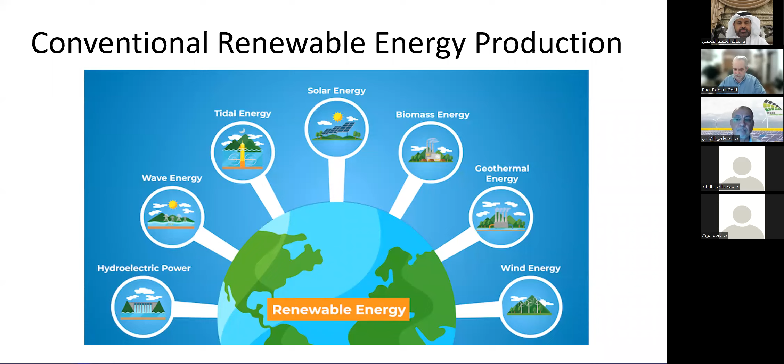We're going to start with solar energy. The sun is at the center of it all. Every day, the sun pours more solar radiation in the form of photons onto Earth than we need for an entire year to power everything on Earth. It could be powered in one day if we had the ability to collect all of that energy.

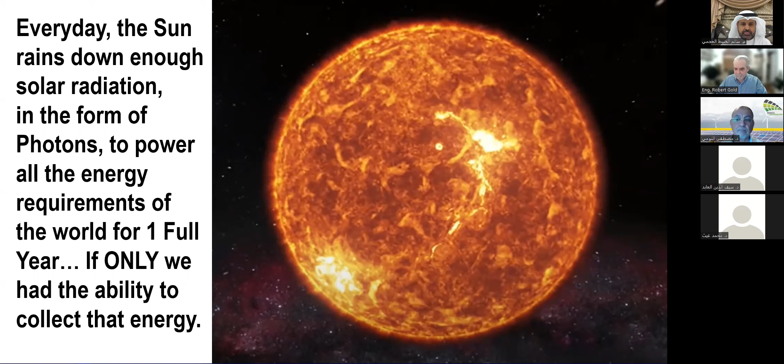You might all know his face, Elon Musk. He once said that if we wanted to power the entire United States, all we'd have to do is take a small section like this, 100 square miles, with solar cells, and we could power the entire United States. Well, right now, I don't think that's possible, and I'm not sure he was correct. There are too many good renewable power sources that can do the job better than taking 100 square miles of the country - any country, whether it's here in the States, Europe, the Middle East, anywhere. There are so many different ways that we can do this.

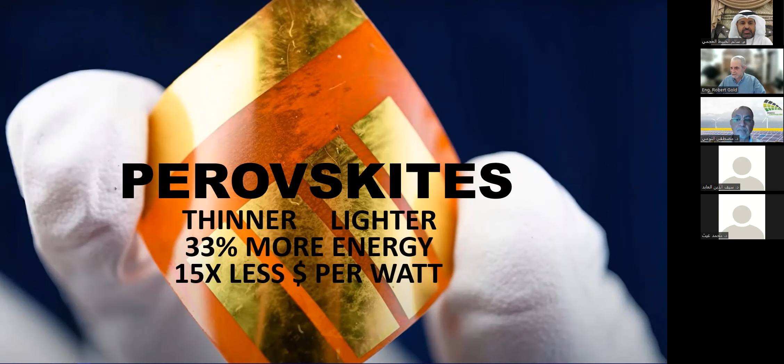Right now, silicon is really the beating heart of solar products, and it's been that for the longest time. But there may be a revolution coming. That revolution is called perovskites. Perovskites are thinner, lighter, 33% more energy efficient, and they cost 15 times less per watt than normal solar cells. And they could be the future of photovoltaics.

And we're going to run a short video here to introduce you to them.

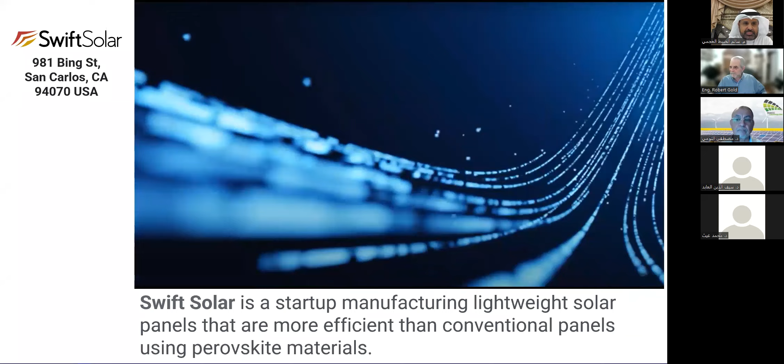It's a new kind of thin film technology, so you've probably heard of that for a long time. Different kinds of thin films have come and gone over the years. What we do here is a new kind of material. It's called perovskites, a new semiconductor material that absorbs light really effectively, also transports charge. So it just turns out to be very efficient material for solar cells.

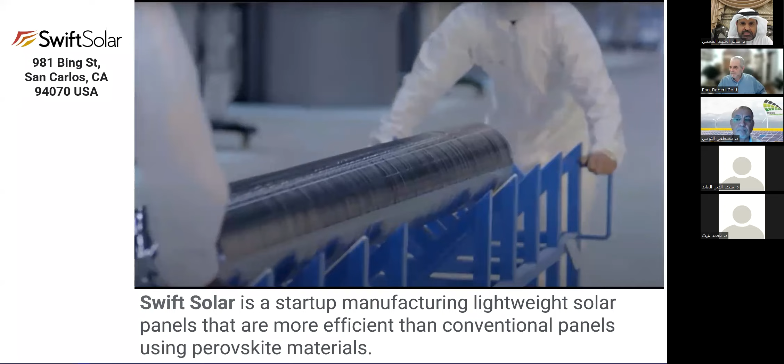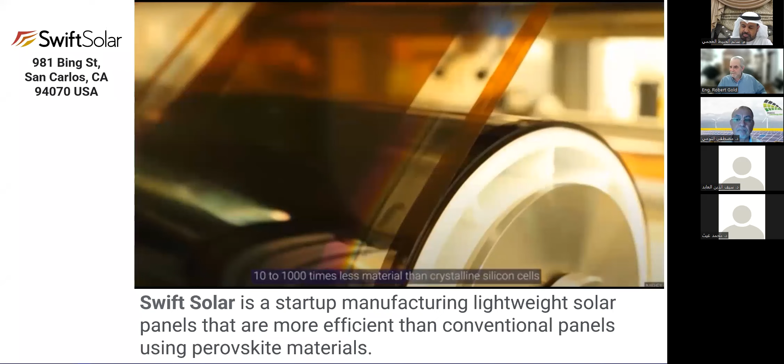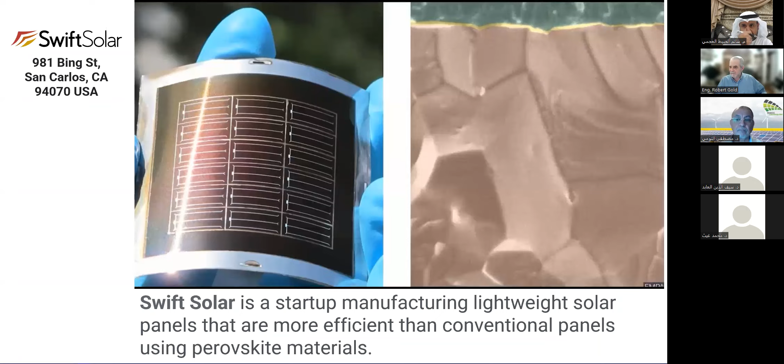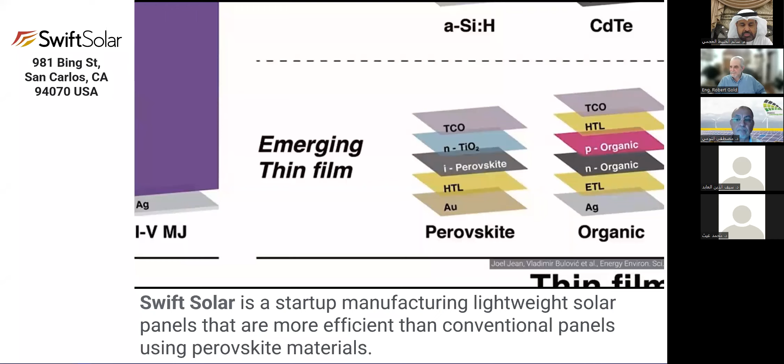Solar cell technologies can be classified into two categories: wafer-based or thin film cells. Wafer-based cells are fabricated on semiconducting wafers and are usually protected by a material like glass. These are the crystalline silicon cells you'll typically find on bulky roof-mounted solar panels. Thin film cells are made by depositing thin layers of semiconducting films onto a glass, plastic, or metal substrate, and use 10 to 1,000 times less material than crystalline silicon cells. These thin film cells are light and flexible but have lower average efficiencies. You can make thin film cells from amorphous silicon or more complex materials like cadmium telluride, but scientists have been on the hunt for better thin film solar technologies that can see more widespread use. These materials are known as emerging thin films. Currently, perovskites are the leading contender. What could you do with a solar panel with 100 times the power-to-weight performance of conventional silicon panels?

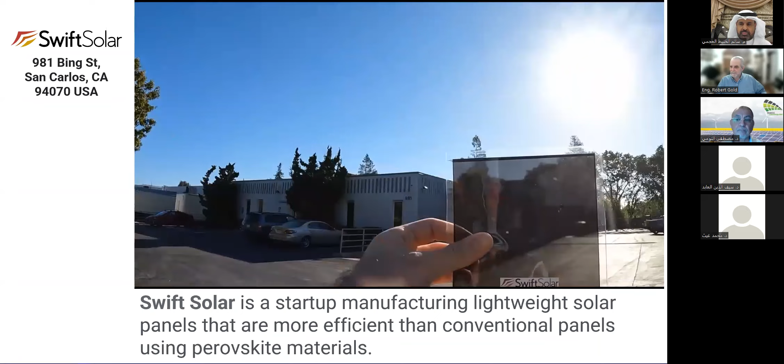A solar material so abundant it could be painted on skyscrapers. Flexible, lightweight, highly efficient cells could open up a wide range of applications where traditional silicon cells are too heavy and rigid. But before we cover your Tesla Model S Plaid in perovskite solar, what exactly is this revolutionary crystal?

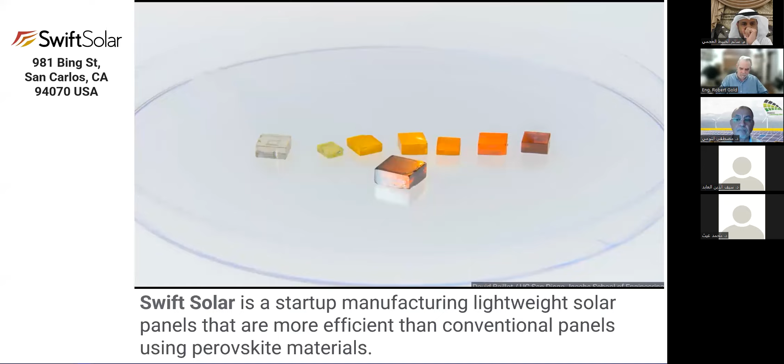The perovskite crystal structure was first discovered as the naturally occurring mineral calcium titanium oxide, but the perovskites used in solar cells don't need to be mined from the earth. A perovskite is any material with a crystal structure following the formula ABX3, where A and B are two positively charged ions, often of different sizes, and X is a negatively charged ion.

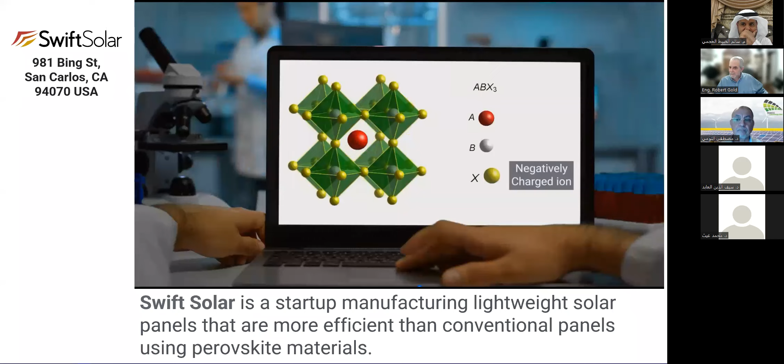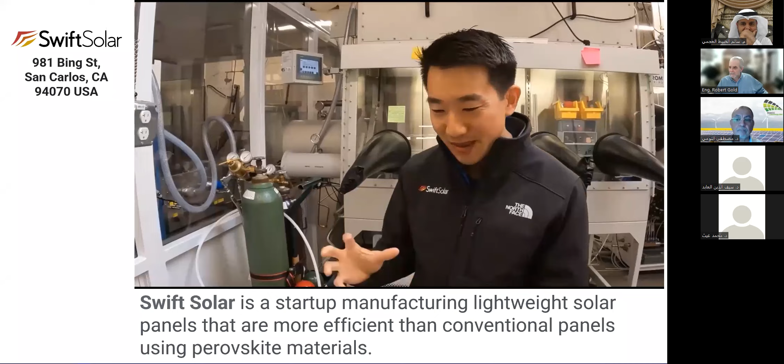Scientists realized they could create a diverse range of man-made perovskite crystals following the same arrangement that have very useful properties. So we use basic metal halide salts, things like lead iodide or some organic salts as well, and we combine them to make these inorganic-organic hybrid perovskites. You can form them in solution or in vacuum out of vapor phase, and they condense into forming these perovskite crystals. The thin films are what perovskite solar cells are made of.

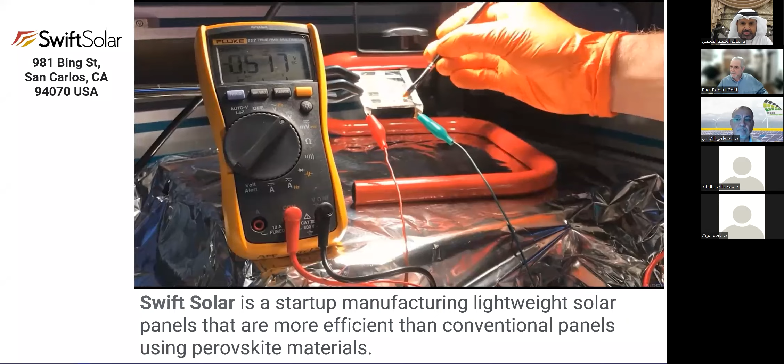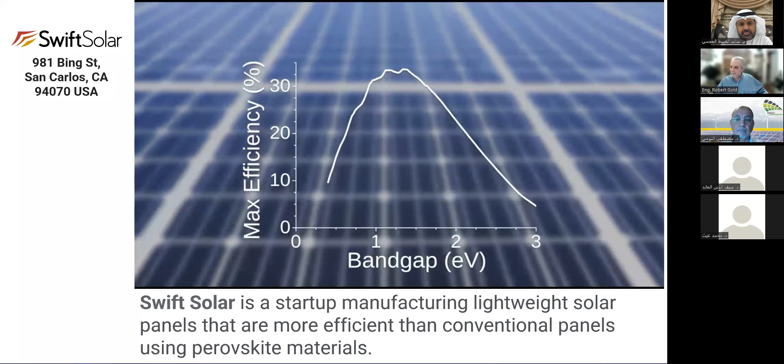The most efficient modern silicon solar panels you'd find on a home only work best at around 20% efficiency. But the theoretical conversion efficiency of single-junction solar technologies is about 33%, called the Shockley-Queisser limit. That's the fundamental limit for a single solar cell, single material-based solar cell.

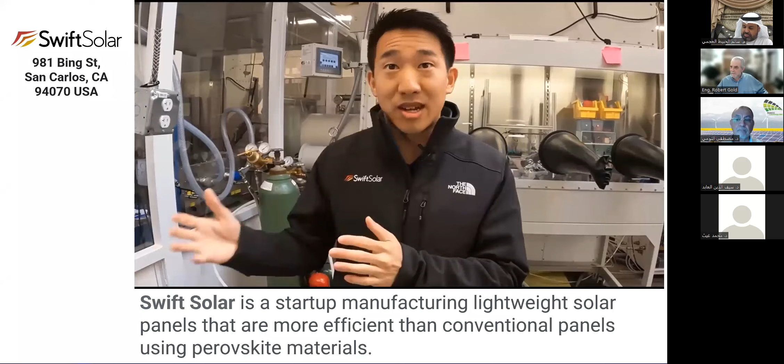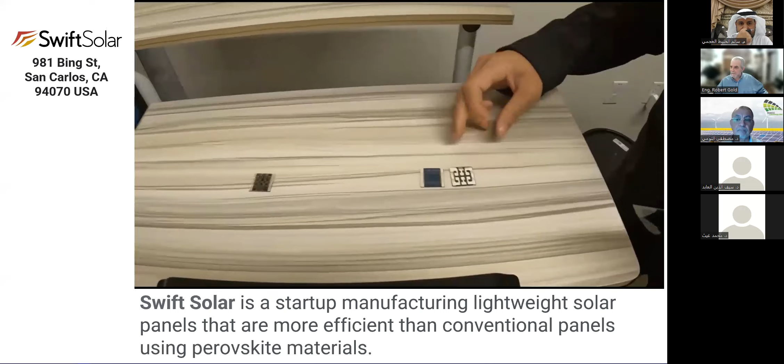Perovskites are the exact same thing. Silicon, perovskites, cadmium telluride, CIGS, all of these technologies have the same limit. But perovskite solar cells can be made in a form factor that's capable of much higher efficiency limits, pushing the boundaries of possibility for solar power.

That's one major breakthrough that is really escalating in the marketplace right now. Another is the fact that they've come up with ways to make printable or paintable solar cells, which will mean people can just paint their homes, paint buildings, whatever, paint vehicles even, to collect sunshine and energize their vehicles or houses. They're also using carbon nanotubes to create some of these paintable technologies, and these are 50,000 times smaller than a human hair. So this is really advancing the technology very rapidly.

Another recent breakthrough from the University of Cambridge, also spoken about in the Journal of Solar Materials, involves materials that are grabbing 100% of the energy carried by photons. This is ridiculously powerful, since most solar cells, as was just discussed, only absorb about 20% of the energy, and perovskites will do 33%.

So when they get these hybrid cells actually going out of this organic material, they're going to be able to harvest much larger amounts. If they make it to 50 or 60%, it will be a revolutionary breakthrough, and it will change solar forever.

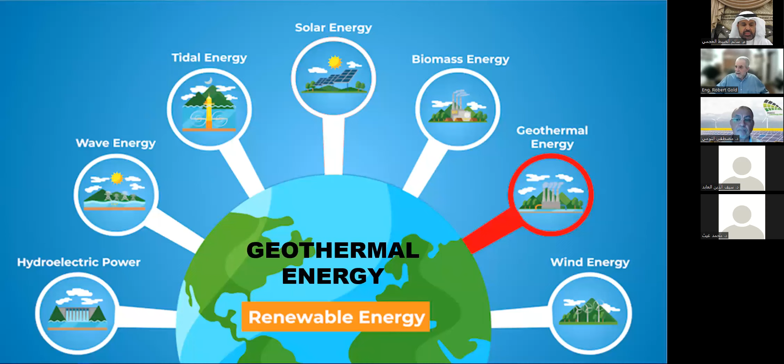Next, we're going to talk about geothermal energy.

A quick review: what is geothermal energy? If you've ever observed an erupting volcano or the geysers at Yellowstone National Park, you've seen geothermal energy in action. The Earth's crust is made of rocks and water. Deep below that is a layer of hot, molten rock called magma, which is even hotter than the sun's surface. The heat just over 6 miles below the surface contains 50,000 times more energy than all the oil and natural gas resources in the world.

Releasing a small amount of that heat in the right way can create electricity. A well drilled a couple of miles deep can capture the rising hot water and steam. That steam spins a turbine, and a generator produces electricity.

Geothermal is one of the least explored sources of renewable energy in the US, and most of us probably don't spend much time thinking about it. But since it's a pollution-free, renewable source of energy that's consistently reliable, at least it has been for the past 4.5 billion years, maybe we should.

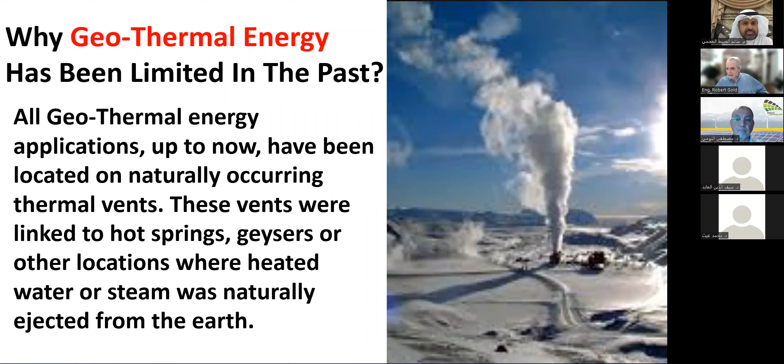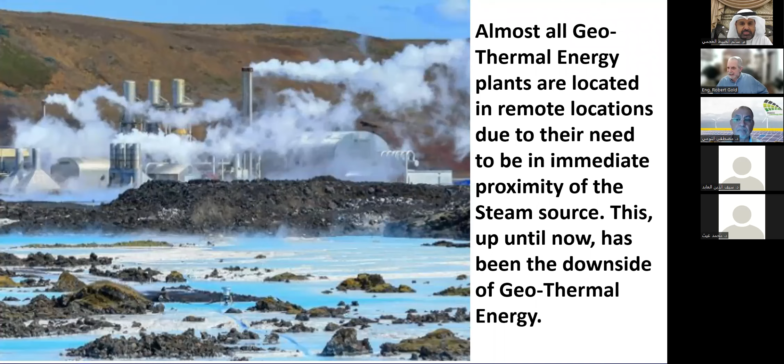So if it's such a great thing, why is geothermal energy such a limited resource? Well, there's a very simple answer. All geothermal energy up until now has been located at naturally occurring thermal vents, hot springs, geysers, things like that. But these were all located in places that aren't the most hospitable or easiest for industry to use. To get geothermal energy, people had to locate their businesses so that they could take advantage of this naturally occurring thermal source. Well, that's changing.

A company called Fervo is an advanced drilling company. They were into all sorts of drilling technologies for years, but they've now developed the next generation geothermal projects that can deliver 24/7 carbon-free energy.

How they're doing this is something called the enhanced geothermal system. Using advanced drilling technologies, they're capable of drilling holes way down into the earth, putting down piping, flowing water down there and injecting water from the surface, then bringing it up as very high pressure steam, turning that into electric power.

This is something that can be done anywhere. It's no longer exclusive to thermal vents or geysers. We can do this in deserts, in tropical areas, in the middle of any country, in the middle of a farm. You could drill these holes and bring up thermal energy.

After researching this, I feel this is going to really change the renewable energy landscape. Geothermal is going to become a large part of that energy component.

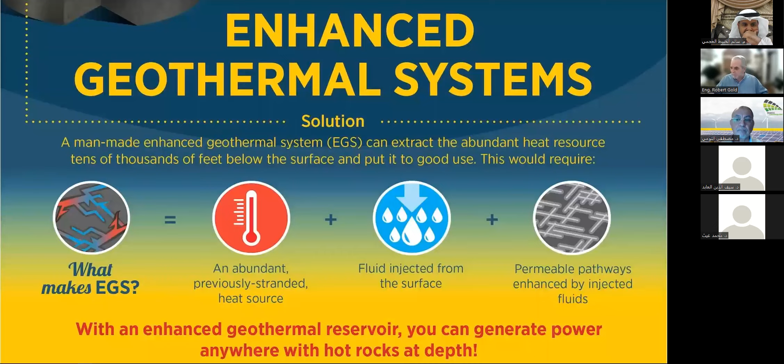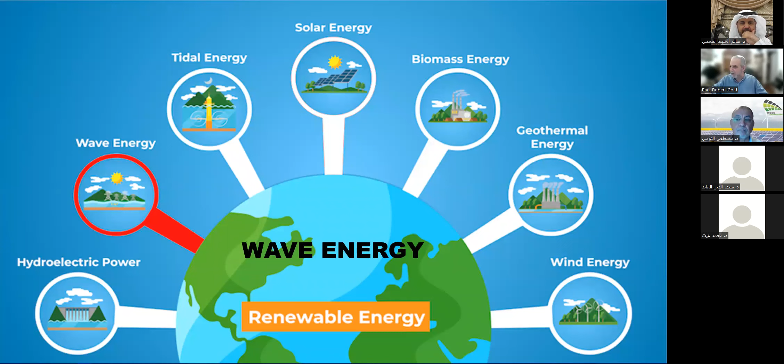The next thing we're going to talk about is wave energy. Wave energy is important because 70% of the planet is water. Three of our electric components here, hydroelectric, wave energy, and tidal, are all water-based energy sources. So let's take a quick look.

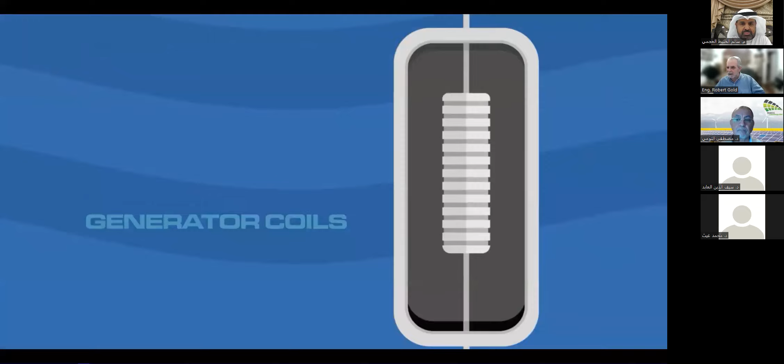What is wave power? Wave power is created by wind, and it creates the renewable resource that keeps waves moving all over the planet. What you're looking at here is a float on the surface moving up and down with the waves. It's pulling a cable that has magnets on it, and those magnets are constantly moving inside of generator coils, which, as we all know, is creating an electric current.

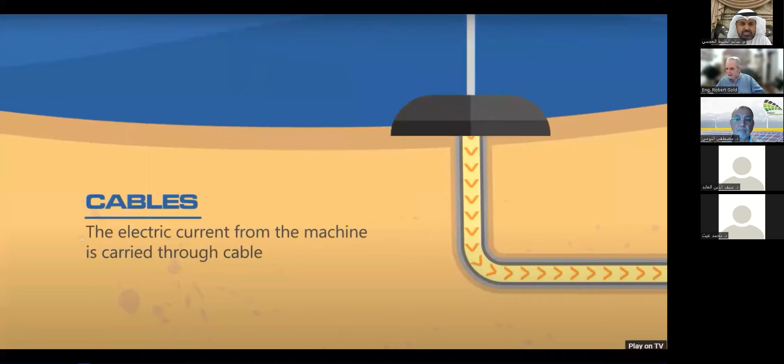That electric current is going into the foundation down below where it's anchored to the seabed, and then cables take it into the land where the energy is then used or stored. You can have literally thousands of these energy pumps sitting on the waves.

There are two types of major wave action renewable energy that are new, and I think they're revolutionary. One is the wave, what we call bobbing up and down, that we just saw. But the other one is something called a wave reservoir turbine.

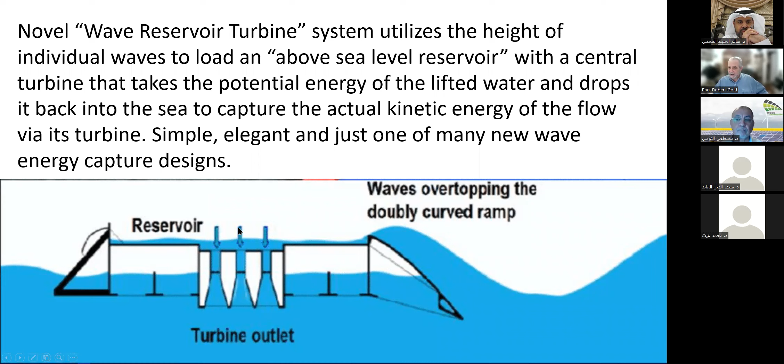The two that we've just spoken about, the bobbing up and down generator, shown here in a different configuration, and the wave reservoir turbine, are two of the latest technologies being introduced into the wave section of renewable energy.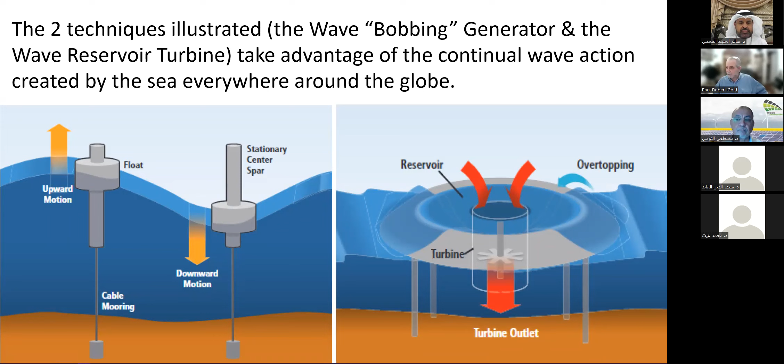We're going to talk about 4 of them first. Three of them are straightforward but very innovative ways of creating power with wind turbines. The 4th one, I have my doubts about. I've included it here because I want to make the point that not all of those 8,000 patents a year are credible. There are a lot of schemes out there because of the interest in wind power generation, where every inventor, and sometimes not really inventors but people just trying to make a dollar, are putting things forward that don't always work. But let's talk about what's out there.

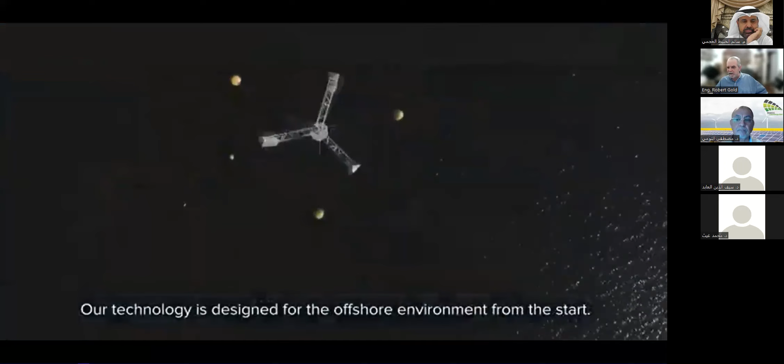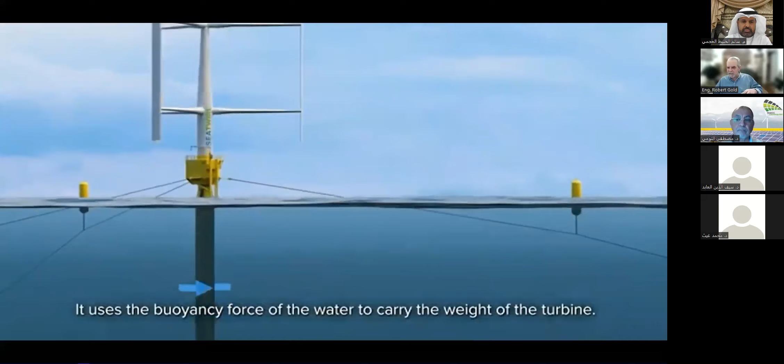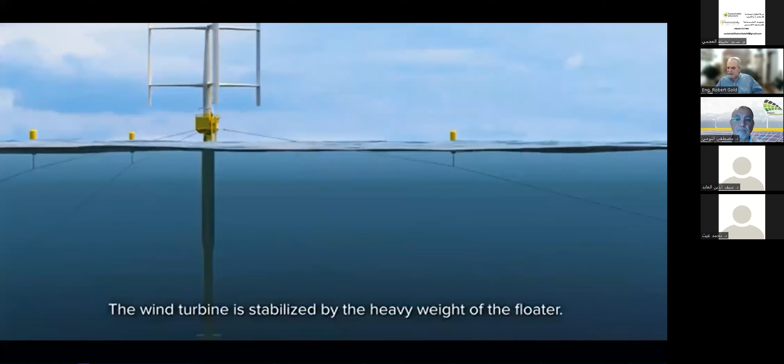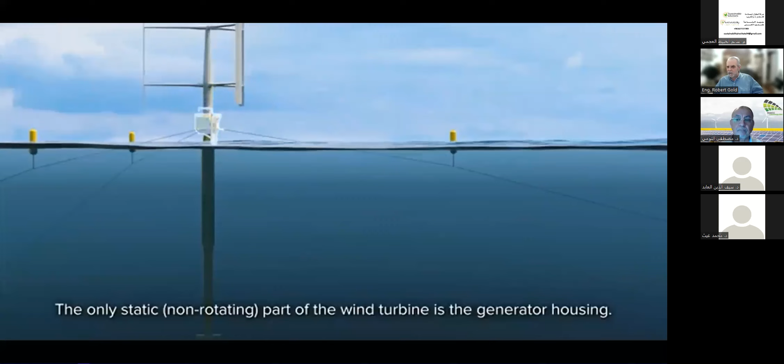SeaTwirl is important because it's built to withstand storms and hurricanes, and it can be placed where other types of wind generation turbines cannot be placed, and that is in deep water. All other wind turbines have to be placed in fairly shallow water because they're mounted into the seabed, whereas Sea Twirl floats and is held down to the seabed only by cables that keep it from moving. The actual system is carried by the buoyancy of the water, and it allows it to be in much deeper water. This is important because deep water is where you find the strongest winds, not really by the shore, it's out in the open ocean away from shore. So this is an important new type of wind turbine that is stabilized by its heavy weight, but its ability to sit out in the open ocean really changes the complexion of the wind turbine.

We have a couple of blurry parts here, I'm sorry, but I think I've already told you what that's trying to say. Offshore, where the winds are the strongest, that's where you can place these. The Sea Twirl turbines can be put way offshore and in much deeper waters, and that makes them a real contender in this industry.

VAWT, which stands for vertical axis wind turbine, is a new type of vertical axis wind turbine. Although we've seen a lot like the Twirl, this wind turbine is segmented so that it can have different spin rates, and that makes the spin velocity less damaging to the foundation where it's placed. So you can create the same or more energy with one of these than you can with a comparable one that is just one solid wind turbine.

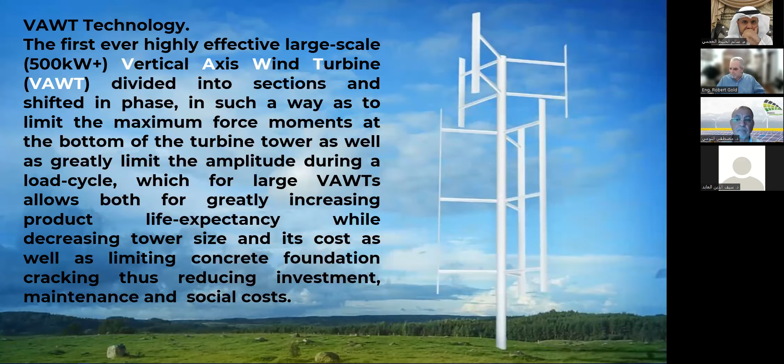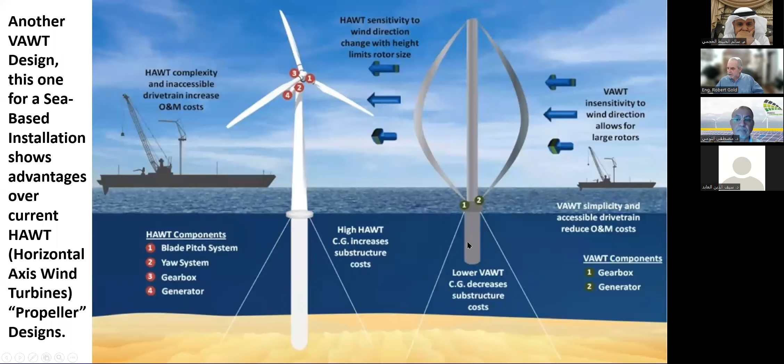Here you have a comparison between a HAWT, which is a horizontal axis wind turbine, and a VAWT, vertical axis wind turbine, and they have different uses in different places. The HAWT is better close to shore, the VAWT is better out in the open ocean. The Twirl is this type of turbine, but designed like this, it is simple and not sensitive to wind direction, so you don't have to worry about aiming it in the right way like you do with the other type of turbine. This is a new type that we've seen before at smaller scales, but allowing it to be anchored out in the ocean is really turning this into something that is cutting edge.

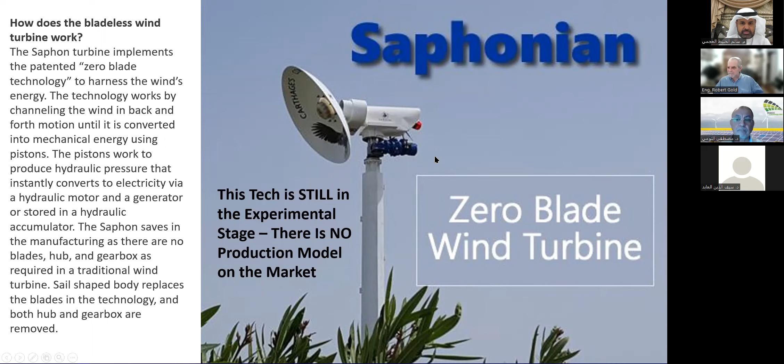Now, I laugh because I've looked into this, I spent hours looking at this technology because I didn't want to badmouth something unless I really had my concerns, and I do. This technology supposedly works by wind pressure against a surface that produces tiny piston movements which convert to hydraulic pressure, which then converts to electricity via a hydraulic motor. I have severe doubts about this, especially since they've already raised a lot of money and this technology still doesn't have an experimental production model. They haven't shown that it really works, but they're touting the zero blade wind turbine and raising a bunch of money on it. I say you don't raise money on something unless you've got proof positive that the energy source functions.

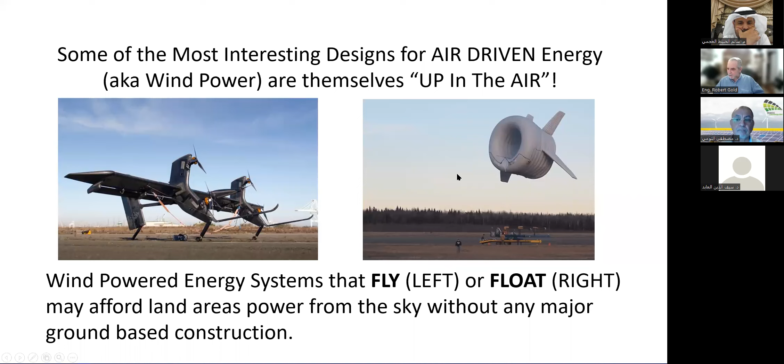Now we've come to what I consider the most interesting part: wind-powered products. What you see here are a flying or gliding wind power product and a floating wind power product.

Let's talk about the flying one first. It acts as a glider and uses the winds above 2,000 feet to keep it up and flying. It has some downsides, but the upside is that if it can be raised to the 30,000 foot level, you're going to get 20 to 40,000 watts per meter of power out of it, which is just truly enormous.

But you're also talking about having a 30,000 foot cable hooking one of these, and it's going to produce at minimum a 2-mile no-fly zone around them, so aircraft aren't smashing into these or the cables. But it is an interesting concept.

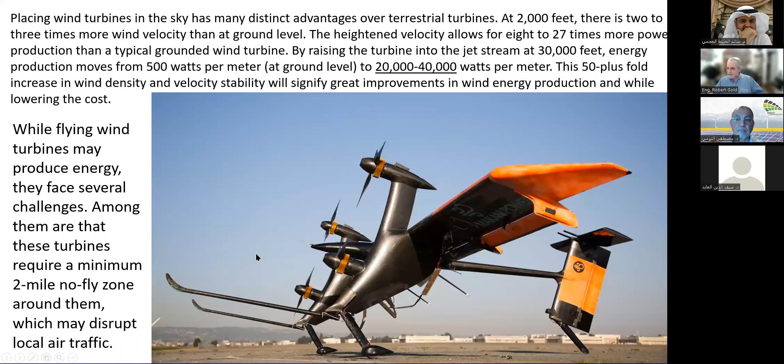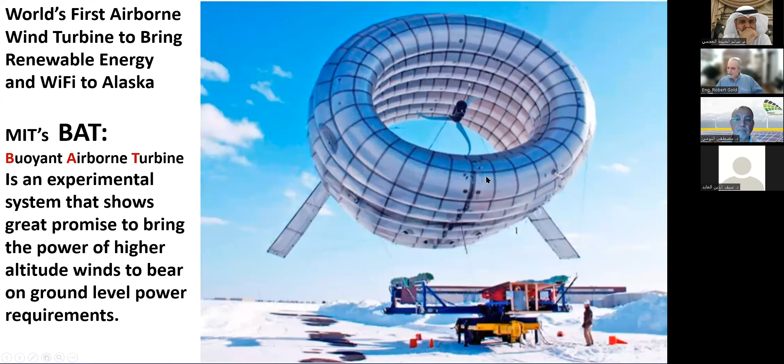More interesting is the BAT, the Buoyant Airborne Turbine. This has been tested since 2014. They're now going into a production run, and this floating turbine, you can see the turbine in the center here, can go up to 1,000 feet in the air and generate enough for, I think, this size.

But an important part of this is not just the power generation. It's the fact that Wi-Fi and cell towers could be built into these. So even small towns could fly these above them, generate their electricity, and provide Wi-Fi and cell service for that location.

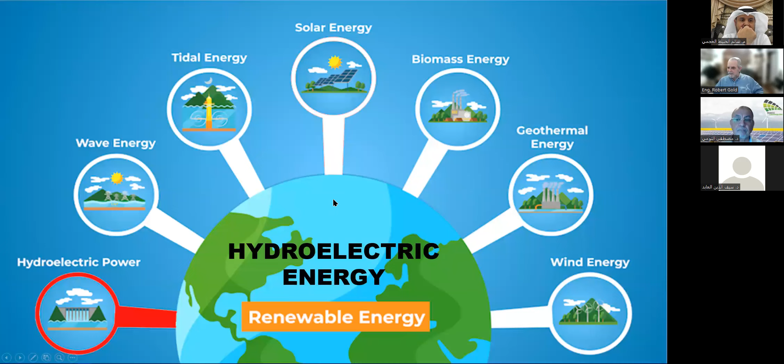Next, hydroelectric, back to the water. And again, a small primer on what hydropower is. Hydropower, or hydroelectricity, refers to the conversion of energy from flowing water into electricity.

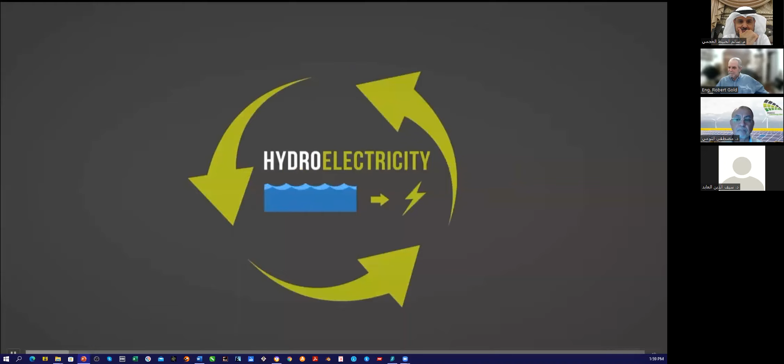It is considered a renewable energy source because the water cycle is constantly renewed by the sun. One of the first uses of hydroenergy was for mechanical milling, such as grinding grains. But today, modern hydro plants produce electricity using turbines and generators.

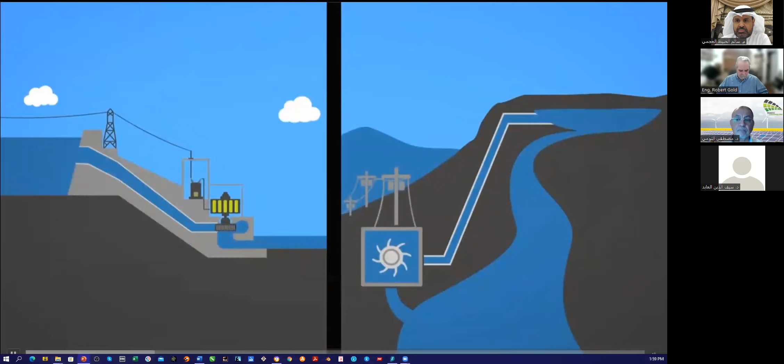The mechanical energy created by moving water spins rotors on a turbine. This turbine is connected to an electromagnetic generator, which produces electricity when the turbine spins. There are 2 main types of hydroelectricity production: dams and run-of-river.

Hydro dams utilize the potential energy from dammed water to produce electricity. A dam is a large barrier constructed to raise the level of water and control its flow. The elevation created by the dam creates gravitational force for turning the turbine when water is released.

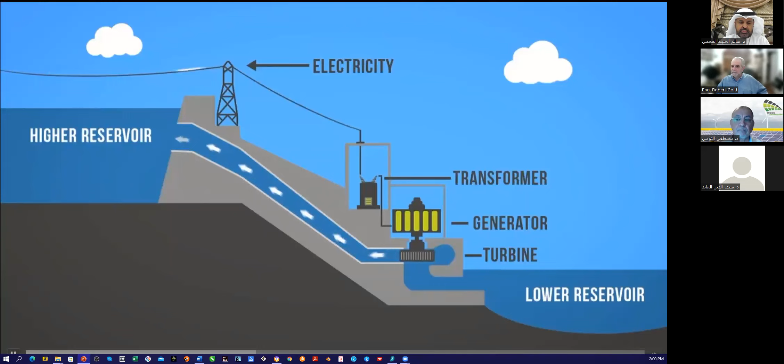Some dams also contain an additional reservoir at their base where water is stored to be pumped to the higher reservoir for release when electricity is in demand. This is referred to as pumped storage hydro.

The second form of hydroelectricity production is run-of-river hydro. Run-of-river still uses turbines and generators, but relies on natural water flow rates of rivers, diverting just a portion of the water through turbines. Because run-of-river hydro is subject to natural water variability, it is more intermittent than dammed hydro.

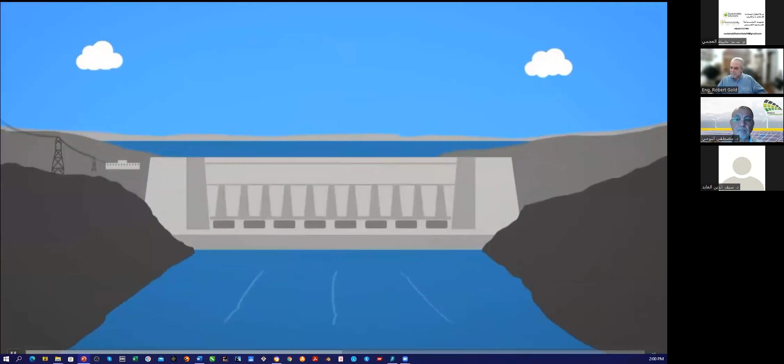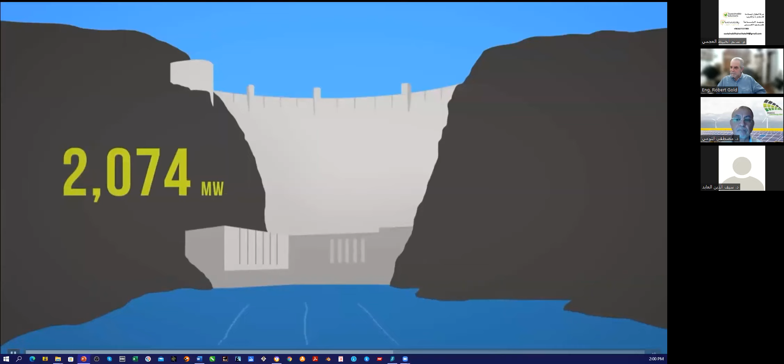There are various sizes of hydro plants that produce electricity: large hydro, greater than 30 megawatts; small hydro, 100 kilowatts to 30 megawatts; and micro hydro, less than 100 kilowatts. The Hoover Dam in the United States is a whopping 2,074 megawatts, which is enough to serve 1.3 million people.

Of all renewable energy sources, hydropower holds the largest share of worldwide electricity production. Hydropower has several benefits. It is a cost-competitive form of electricity, even though the initial building cost can be high.

It is quite reliable compared to other renewable options and pairs well with other sources as it can be used as baseload power. In some cases, dammed reservoirs can also help with flood control and be a reliable water supply for communities. There are also some concerns with hydropower, especially when it comes to large dams.

Damming a river has a major impact on the local environment, changing wildlife habitats, blocking fish passage, and often forcing people in riverside communities to move out of their homes. In addition, dam failures can be catastrophic, claiming the lives of those living downstream.

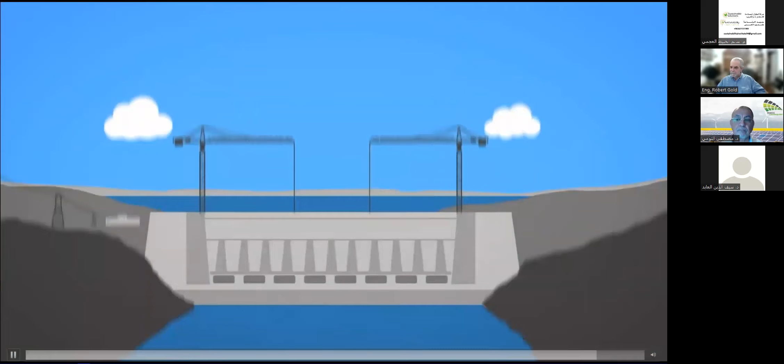Hydro plants are also not completely free of greenhouse gas emissions. As with most forms of energy, carbon dioxide emissions happen during construction, particularly due to the large quantities of cement used, and plant matter in the flooded areas makes methane, another greenhouse gas, as it decays underwater. That's hydropower.

Right now, pumped hydro is one of the largest systems used globally as a hydropower resource, and it's getting even more popular.

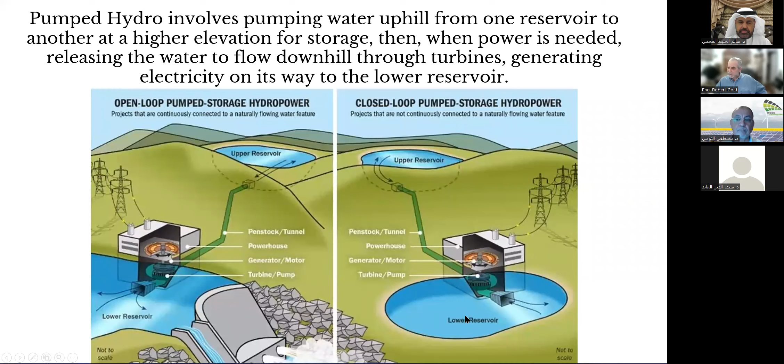Here are the two types. An open loop pump storage uses a reservoir that is part of a dam, and it pulls water in and out to create power when needed. A closed loop pump storage uses an upper and a lower reservoir, using electricity purchased at a low rate to pump water up to the upper reservoir, and when they need power and rates are high, they let it flow back down to the lower reservoir.

It is estimated that only a few hundred pumped hydro sites would be needed to support the entire renewable U.S. electricity system. It seems like everybody has their own view. Elon Musk says it's 100 square miles of solar cells. Others who quote these statistics say it's only 100 or so pumped hydro sites, but I believe it's a combination of all the different types of renewable energy that will see the world through to a new era.

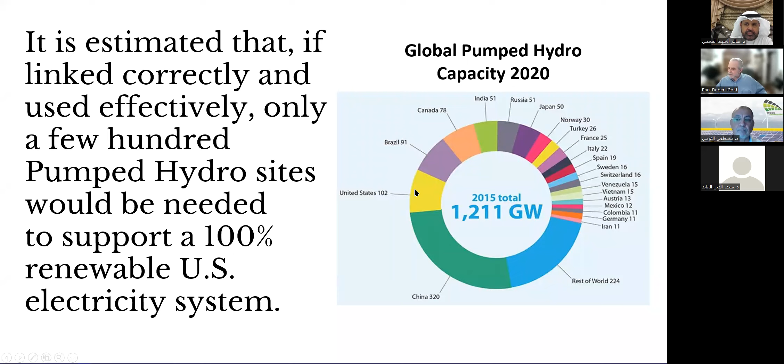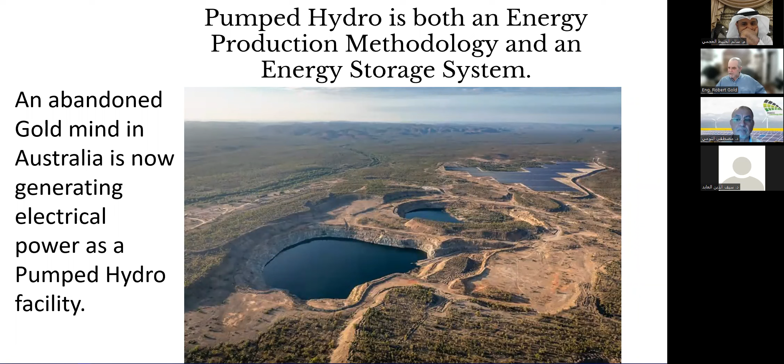One of the things happening now is people realizing that an abandoned gold mine in Australia has two of its pits now being used as a pumped hydro facility. So people are finding ways to create pumped hydro renewable resources where there are no natural water supplies.

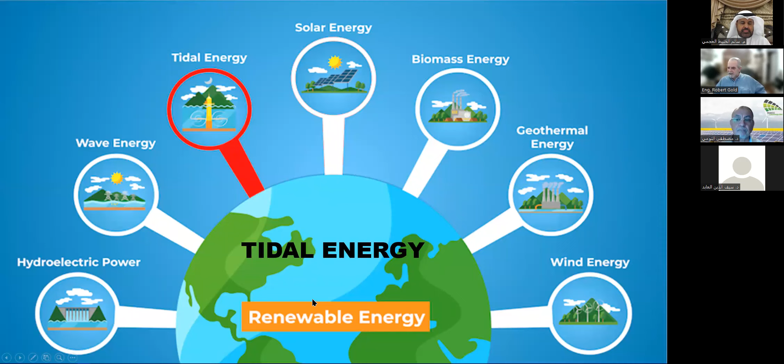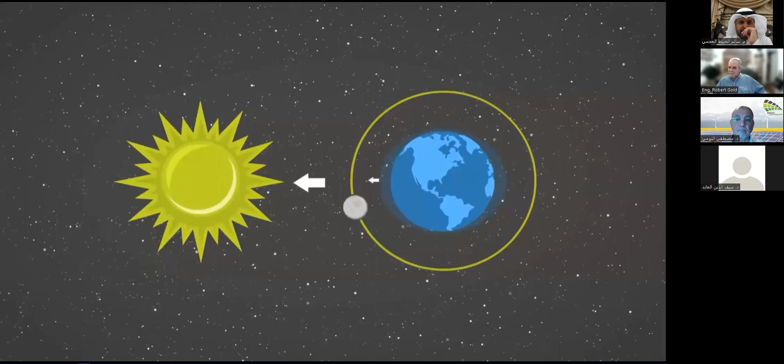Our third and final water renewable energy is tidal energy, and there's a lot of innovation in this space. A quick primer on tidal power: it is a form of hydropower that converts the energy from the natural rise and fall of the tides into electricity. Tides are caused by the combined effects of gravitational forces exerted by the moon, the sun, and the rotation of the earth.

Tidal plants can only be installed along coastlines. Coastlines often experience two high tides and two low tides daily. The difference in water levels must be at least 5 meters high to produce electricity.

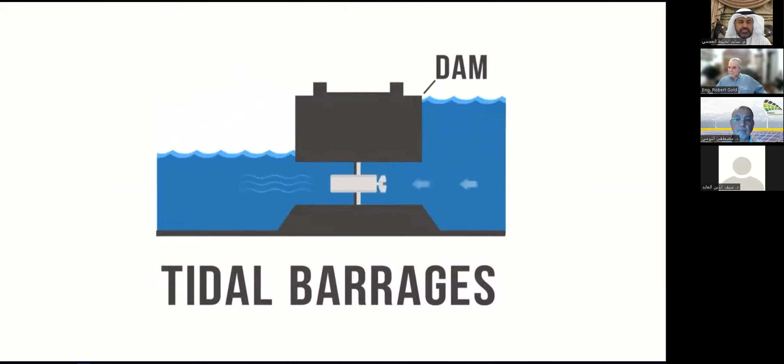Tidal electricity can be created from several technologies, the main ones being tidal barrages, tidal fences, and tidal turbines. Tidal barrages are the most efficient tidal energy sources. A tidal barrage is a dam that utilizes the potential energy generated by the change in height between high and low tides. This energy turns a turbine or compresses air, which in turn creates electricity.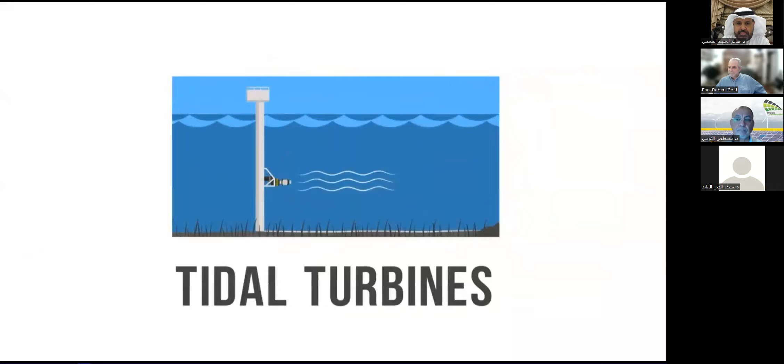Tidal fences are turbines that operate like giant turnstiles, whereas tidal turbines are similar to wind turbines, only underwater. In both cases, electricity is generated when the mechanical energy of tidal currents turns turbines connected to a generator, which produces electricity. Ocean currents generate relatively more energy than air currents because ocean water is 832 times more dense than air and therefore applies greater force on the turbines.

Tidal power is easy to install and renewable, having no direct greenhouse gas emissions and a low environmental impact. Because the ocean's tidal patterns are well understood, tidal energy is a very predictable energy source, making it highly attractive for electrical grid management. This sets it apart from other renewables that can be more unpredictable.

However, adoption of tidal technologies has been slow, and so far the amount of power generated using tidal power plants is very small. This is due largely to the very specific site requirements necessary to produce tidal electricity. Additionally, tide cycles do not always match daily consumption patterns of electricity, and therefore do not provide sufficient capacity to satisfy demand. That's tidal power.

There are two new types of innovation in tidal energy: the windmill type and the tidal kites type. Here you're looking at one of the large new windmill systems that is put offshore to use the tides.

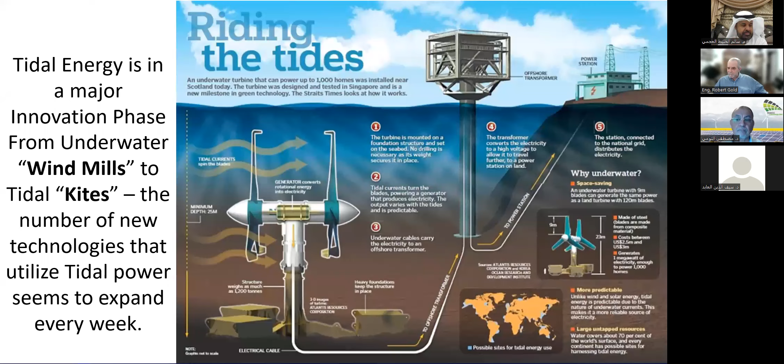Here's a typical tidal barrage that uses a tidal basin and the ocean to make the water flow back and forth, and these can be placed where the topography creates configurations that make it easy enough to install.

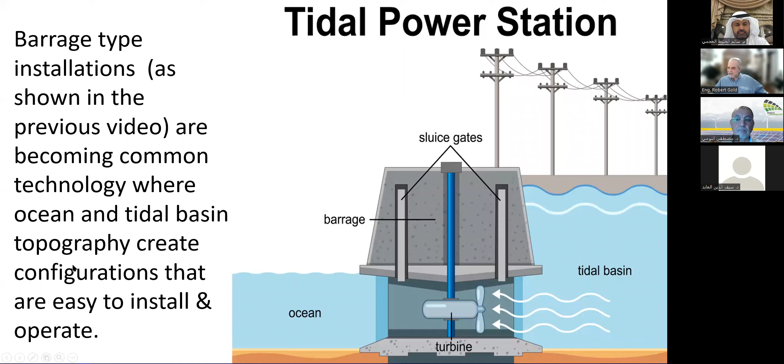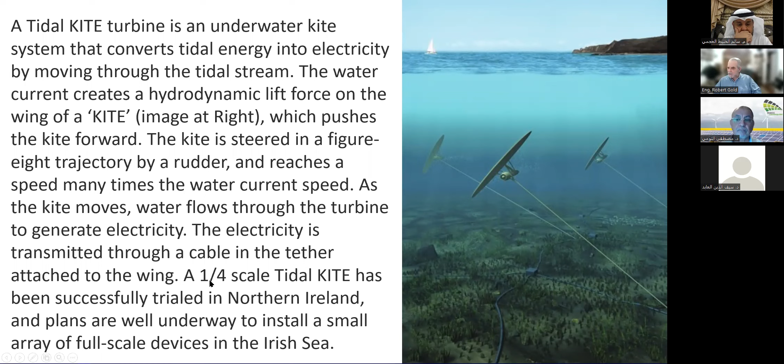The tidal kite I just mentioned is a new type of tidal system that is actually a kite moored to the floor of the ocean, but it flies back and forth in a figure-8 pattern, absorbing electricity via a turbine in the body of the kite. It's sort of like a little airplane, but a kite on a string, sending it back and forth, and it can just stay there forever, picking up power. Right now they have a 1/4 scale unit in Northern Ireland, and they hope to put more into the ocean out there very shortly, at full scale.

Here's what I was talking about. The power of tidal motion is used to pull air. As the tide goes out, the water lowers and it sucks air in through the turbine and spins the generator. As the tide comes in, it presses up and makes the air pressure move through the turbine the other way, spinning the generator again. So you get both motions, tide in and tide out, generating power without the actual water doing any work other than exerting pressure inside of this chamber.

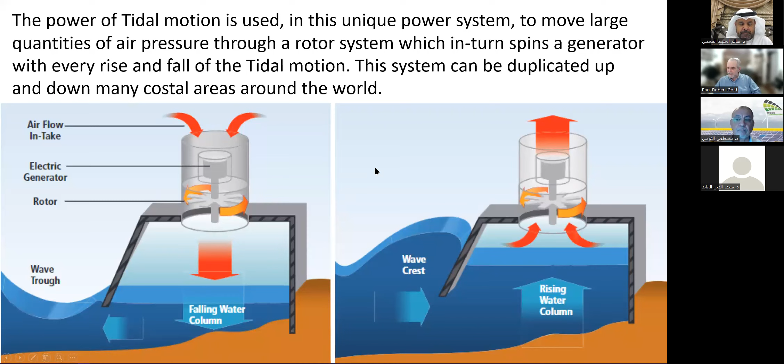And because of how this works, this is much easier to place up and down many coastal areas around the world than the other systems. But tidal power is still advancing in many ways, like this standalone twin-bladed turbine that can be placed in many areas inside and outside of tidal basins, anywhere where the tides are powerful enough.

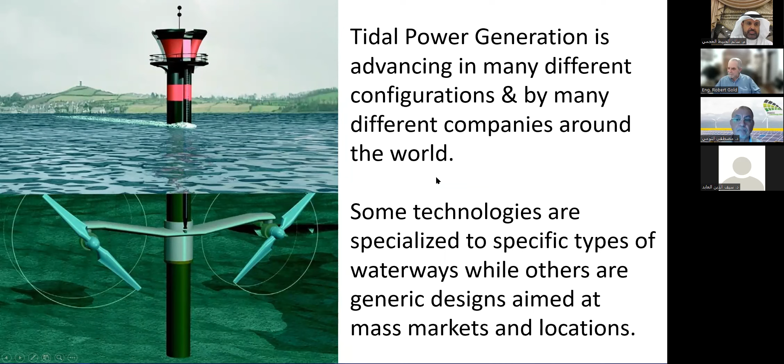Let's talk about biomass. And again, I'm going to show you a quick primer. Biomass, the original renewable energy. It's been part of our lives since our ancestors learned to control fire. In fact, it's made possible by the sun, whose energy is absorbed by trees and plants through photosynthesis, and then released when organic matter is burned or decomposes.

First, there's plant waste. Wood scraps, sawdust, and crop waste can be collected from farms or manufacturers. The waste is burned to heat water. The hot water creates steam. The pressure of the steam spins a turbine. The turbine powers a generator. The generator creates electricity. Simple, really.

Next up, animal waste, also known as the problem of cow poop. The solution? Waste from farm animals can be collected in a large tank called a digester, filled with bacteria that eats the waste and converts it to methane gas. The methane is captured and burned to heat water and create steam. Sound familiar? Second verse, same as the first. This same principle can also be used to capture methane, a potent greenhouse gas with 25 times the heat-trapping ability of carbon dioxide.

From landfills: once a section of the landfill is closed off, pipes are run from the waste to collect the gas, which can then be burned to make electricity or heat. Biomass may not be the prettiest form of renewable energy, and it needs to be used carefully and thoughtfully to protect ecosystems and prevent greenhouse gas emissions. But it can be a smart way to make use of waste. Power to the poop.

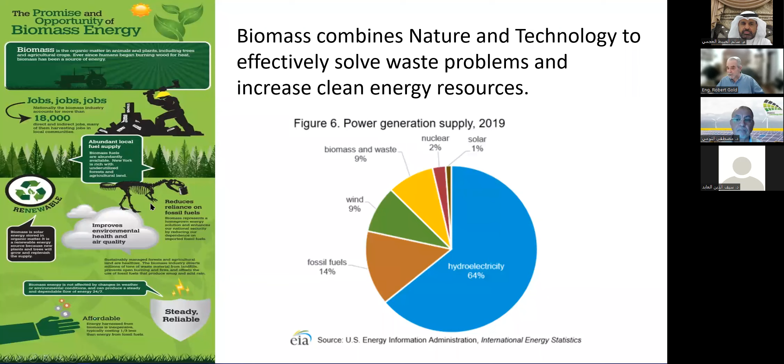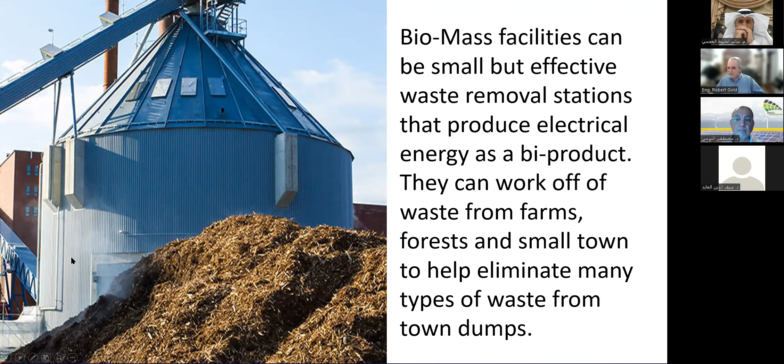There are so many ways that we can use biomass to improve the environment, almost too many to list. There are small but effective biomass facilities popping up all over the country to remove biowastes produced by farms, animals, and forests. This helps eliminate many types of waste from town dumps, while producing electricity and taking away many environmental hazards. There are also plans for very large-scale biomass facilities to be built all around the world, and a facility of this type and size could take in thousands of tons a month of waste that could be turned into electricity and pumped back into the power grid.

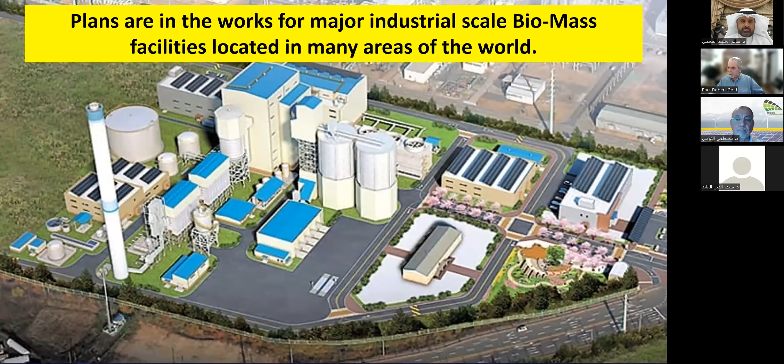All in all, renewable energy technologies combine to form a future that is less wasteful, more energy efficient, and more easily sustainable.